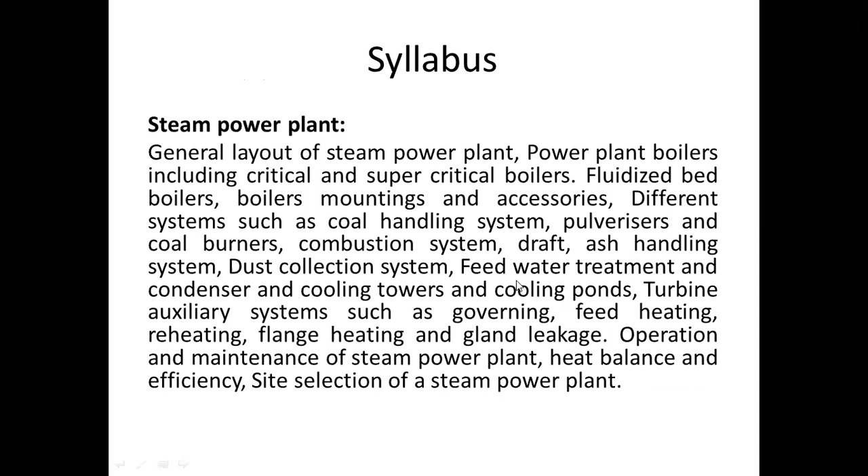यहाँ पर वाटर इज़ नॉट अवेलेबल इन इट्स प्योरेस्ट फॉर्म, दैट्स वाय वी नीड ट्रीटमेंट ऑफ द वाटर। सो उस वाटर को हम प्योरीफाई करते हैं, उस वाटर से इम्प्योरिटीज़ को रिमूव करते हैं। ये थर्मल पावर प्लांट का सिलेबस हमारी यूनिवर्सिटी AKTU लखनऊ ने दिया है, और इस सिलेबस में ये टॉपिक है फीड वाटर ट्रीटमेंट, जो आज हम डिस्कस करेंगे।

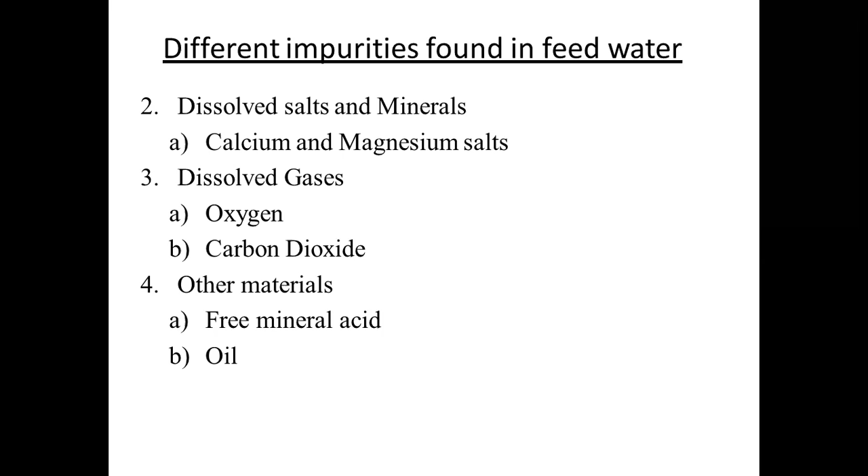सेकंड कैटेगरी है डिजॉल्व्ड सॉल्ट एंड मिनरल्स - कैल्शियम एंड मैग्नीशियम सॉल्ट्स आर डिजॉल्व्ड। कुछ डिजॉल्व्ड गैसेस भी हैं, ऑक्सीजन, कार्बन डाइऑक्साइड, और कुछ अन्य मटेरियल्स भी प्रेजेंट हो सकते हैं जैसे फ्री मिनरल एसिड एंड ऑयल। सो वी हैव टू रिमूव ऑल दीज़ इम्प्योरिटीज़ वन बाय वन।

इस हार्ड एडरिंग और कोटिंग की वजह से बॉयलर की शेल की थर्मल कंडक्टिविटी कम हो जाती है। इन सिंपल वर्ड्स वी कैन से कि बॉयलर शेल, बॉयलर ड्रम, बॉयलर वॉल की हीट ट्रांसफर कैपेसिटी कम हो जाती है और वाटर को हीट कम अवेलेबल हो पाती है।

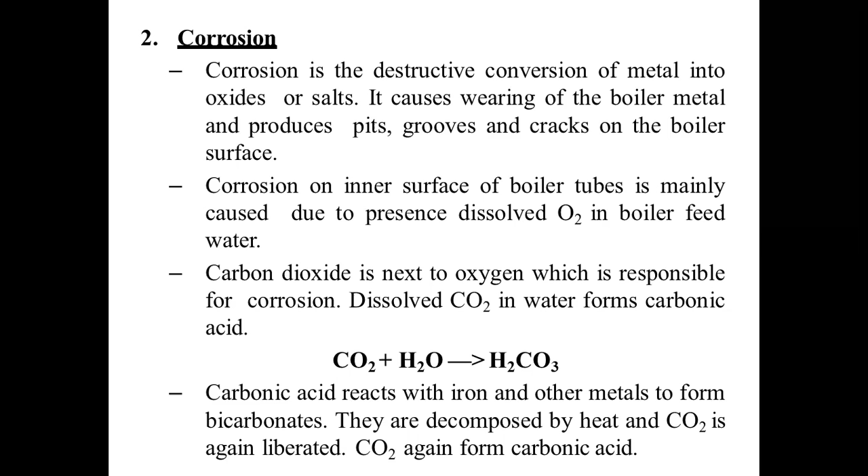Dissolved CO2 in water forms carbonic acid. Here we have shown a reaction: CO2 plus H2O converts into H2CO3. Carbonic acid reacts with iron and other metals to form bicarbonates. These bicarbonates are decomposed by heat and CO2 is again liberated, which mixes with H2O to form carbonic acid again. Then carbonic acid again forms bicarbonate and liberates CO2. So this cycle continues and continues.

Third effect is priming, foaming and carryover. Due to the presence of soluble and insoluble salts in water, the steam passage is filled with a mass of frothy bubbles, known as foaming. Foaming can be reduced by adding castor oil, anti-foaming agents, and sodium aluminate.

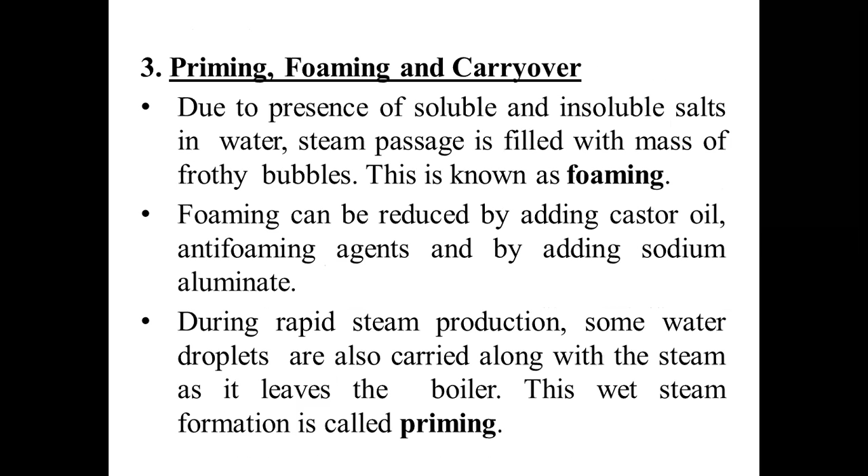During rapid steam production, some water droplets are also carried along with steam as it leaves the boiler. This wet steam formation is called priming. Priming and foaming occur together and this is referred to as carryover.

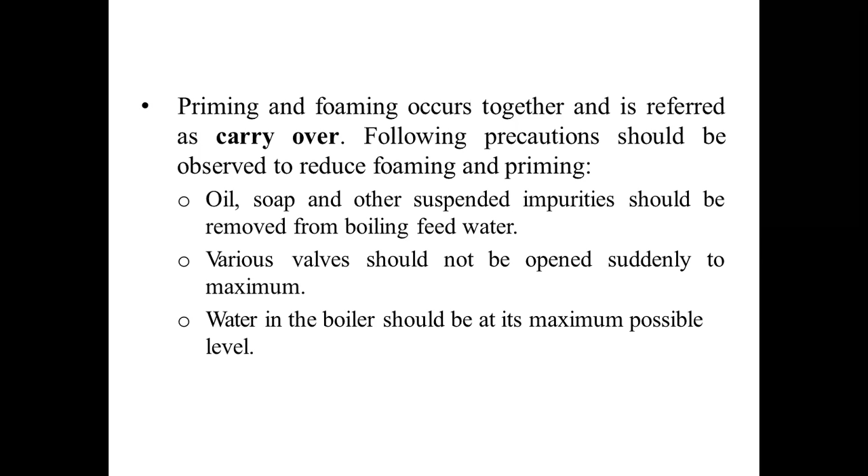Following precautions should be observed to reduce foaming and priming: oil, soap and other suspended impurities should be removed from boiler feed water; various valves should not be opened suddenly to the maximum, they must be opened slowly; and water in the boiler should be kept at its maximum possible level.

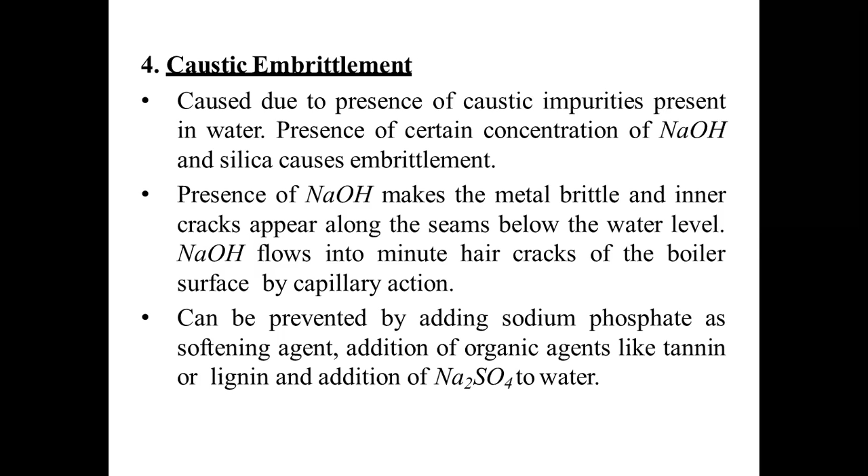The fourth effect is caustic embrittlement, caused due to the presence of caustic impurities in the water. Presence of certain concentrations of NaOH and silica cause embrittlement. Presence of NaOH makes the metal brittle and inner cracks appear along the seam below the water level. NaOH flows into minute hair cracks on the boiler surface by capillary action, and this can be prevented by adding sodium phosphate as a softening agent, adding organic agents like tannin or lignin, and adding Na2SO4 to the water.

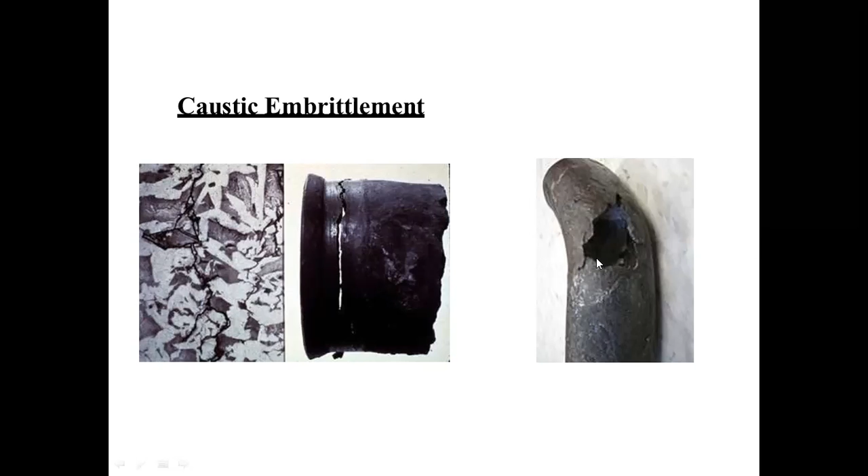Now what is the role of pH in corrosion and scale formation? pH is the power of hydrogen. The pH value of water is the logarithm of the reciprocal of the hydrogen ion concentration in water. If the concentration of hydrogen ion in water is 10 raised to minus 7, then the pH value of the water will be log of 1 by 10 raised to minus 7, which is equal to 7 at 20 degrees Celsius.

So when the pH value of water is 7, it is considered good water. pH value varies from 0 to 14. A sample of water having a pH value less than 7 indicates acidity, and more than 7 indicates alkalinity. Since pH is a logarithmic function, solutions with pH values of 6, 5 and 4 are respectively 10, 100 and 1000 times more acidic than a solution with pH value 7.

So we want the water to be available at pH value 7. What is the role of pH? The corrosion rate of iron in absence of oxygen is inversely proportional to pH value. At lower pH values, iron will be more soluble. The oxygen in water unites with ferrous hydroxide to form ferric hydroxide. The pH value of feed water should be kept greater than 9.6.

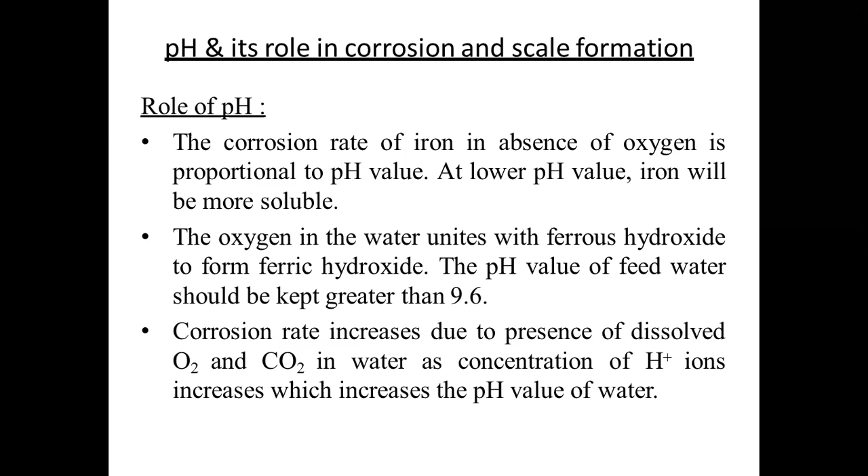Now we will discuss the water treatment system. One is internal water treatment system. In this method, dissolved solids are removed in the boiler itself by adding chemicals, either to precipitate the impurities so they can be removed in the form of sludge, or to convert impurities into harmless salt. So there are various methods available.

The methods are sodium carbonate treatment, phosphate treatment, sodium aluminate, colloidal treatment, and blowdown system.

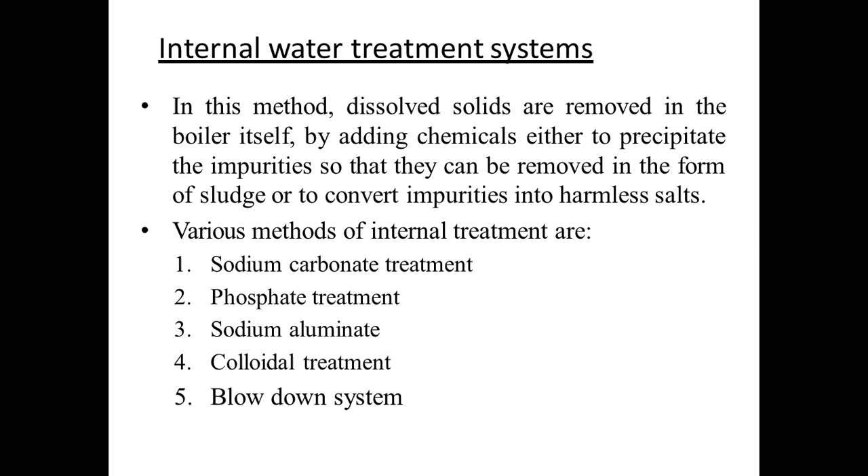Dissolved solids are removed by adding sodium carbonate, Na2CO3, also known as soda ash, to boiler water. Here CaSO4, calcium sulfate, is the impurity. We add soda ash, Na2CO3, which converts it into CaCO3, which is insoluble, and Na2SO4. This Na2SO4, when it comes in contact with water and gets heat, converts into NaOH, H2O, and CO2.

To remove this NaOH, we add MgSO4, magnesium sulfate. When magnesium sulfate comes in contact with NaOH, it converts into Mg(OH)2, which is sludge, and Na2SO4. So we can remove this sludge.

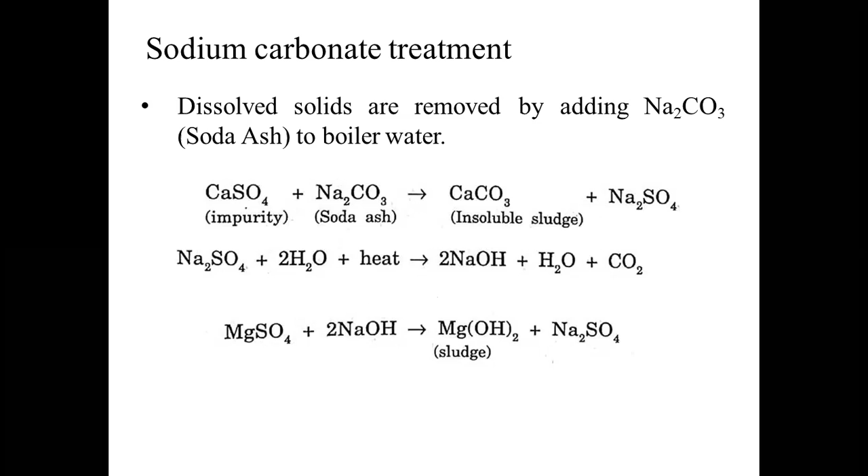Monosodium phosphate is used for highly alkaline boiler water. Disodium phosphate is preferred for moderate alkaline boiler water, and trisodium phosphate is preferred for less alkaline water. So you have to see which type of water is available.

So before applying sodium phosphate, you must know which type of water it is, whether higher alkaline, moderately alkaline, or less alkaline water.

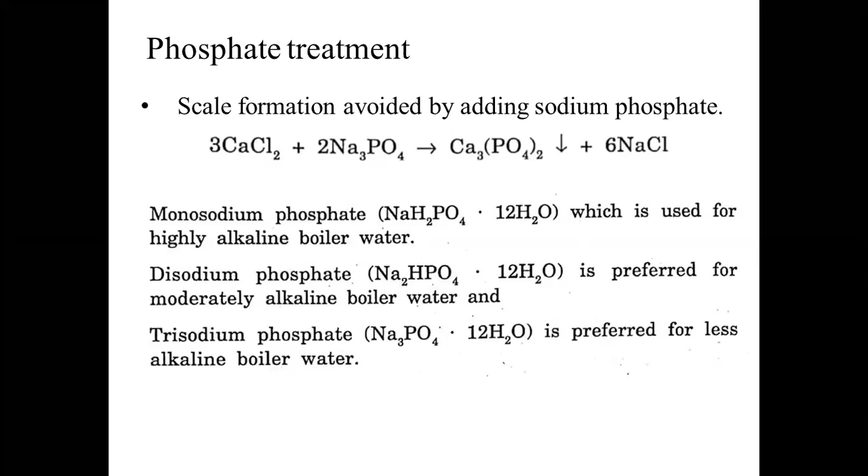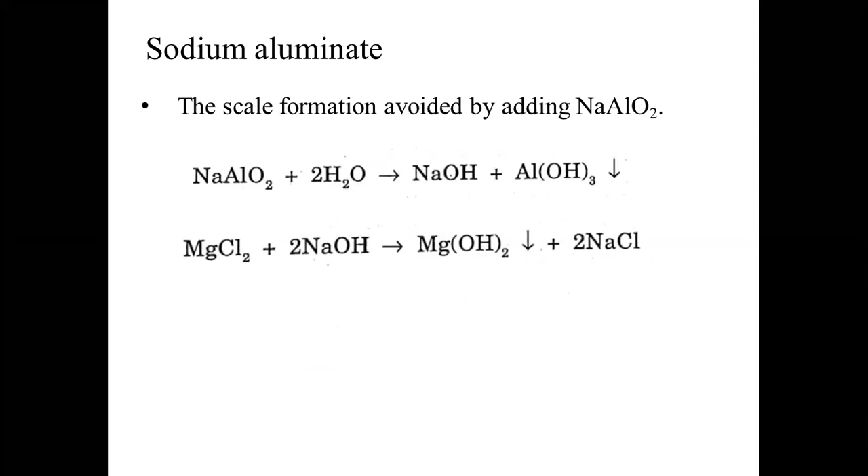Next one is sodium aluminate. Here scale formation can be avoided by adding sodium aluminate to the water. Whenever we add sodium aluminate to the water, it converts into NaOH and Al(OH)3. Also this NaOH comes in contact with MgCl2 and converts into Mg(OH)2 plus NaCl.

Next one is colloidal treatment. It is used for low pressure boilers to prevent scale formation by adding organic substances like tannin, starch, lignin, kerosene. A coating of these substances is formed over scale-forming precipitates, resulting in the formation of non-sticky and loose deposits similar to sludge, which can be removed by blowdown.

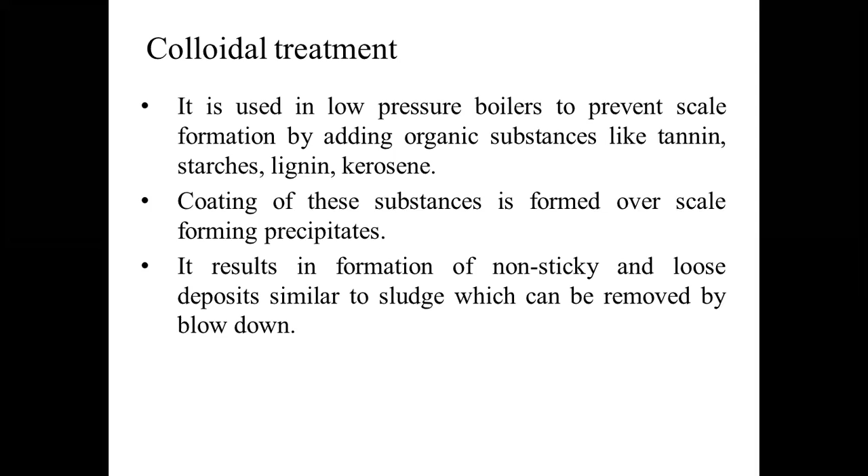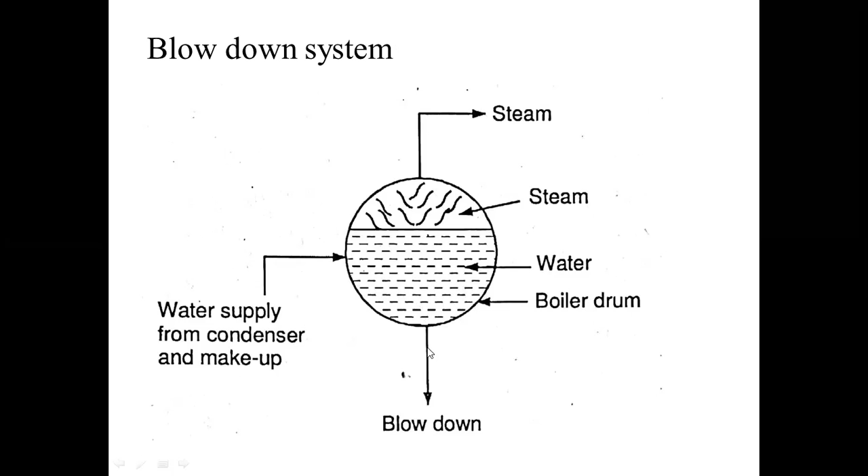Now the blowdown system. You can see here there is a boiler drum. In this boiler drum, water is filled, and when we supply heat to the water, some of it converts into steam, which can be collected from the top. Now the impurities that settle down at the bottom can be removed from here, which is the blowdown.

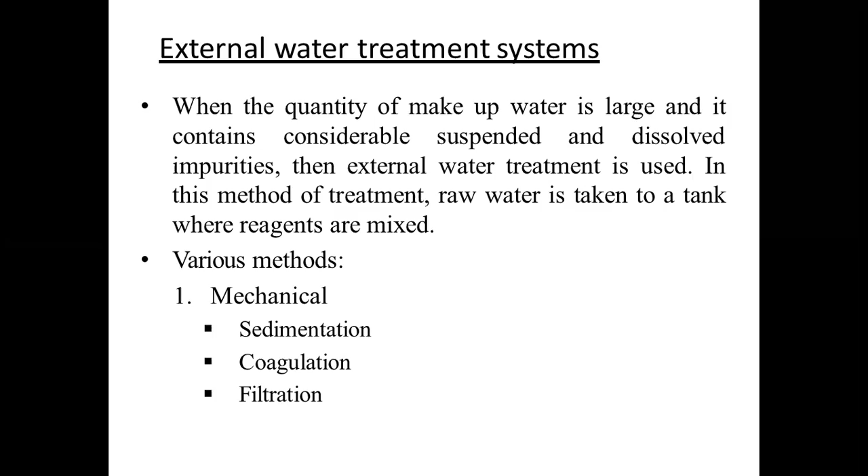In this method of treatment, raw water is taken to a tank where reagents are mixed. Various methods are available for external water treatment. One is mechanical method, where we do sedimentation, coagulation, filtration. There is thermal method, in which distillation, evaporation, and deaeration is done. And next is chemical treatment, where lime soda treatment, zeolite process, and demineralization is done.

Now we are talking about sedimentation. What is sedimentation? In this method, water is allowed to remain standstill in a big tank, or to flow at very low velocity. The solid matter settles down due to gravity, which can be removed periodically or continuously. Clean water is taken from the surface of the tank.

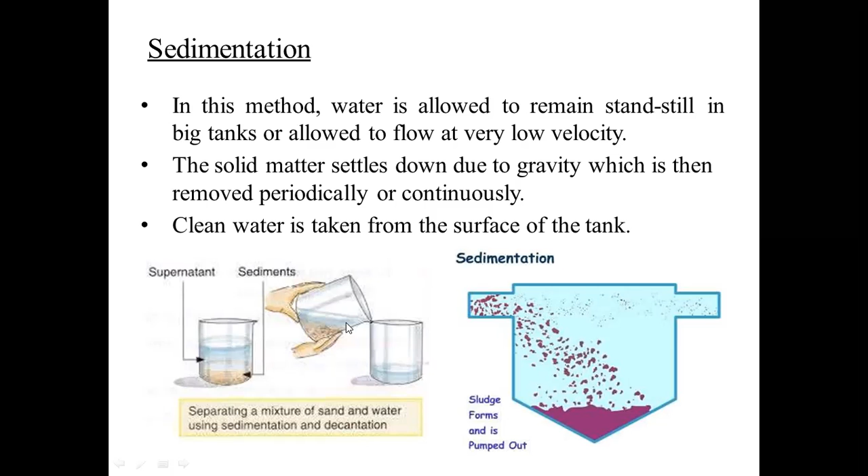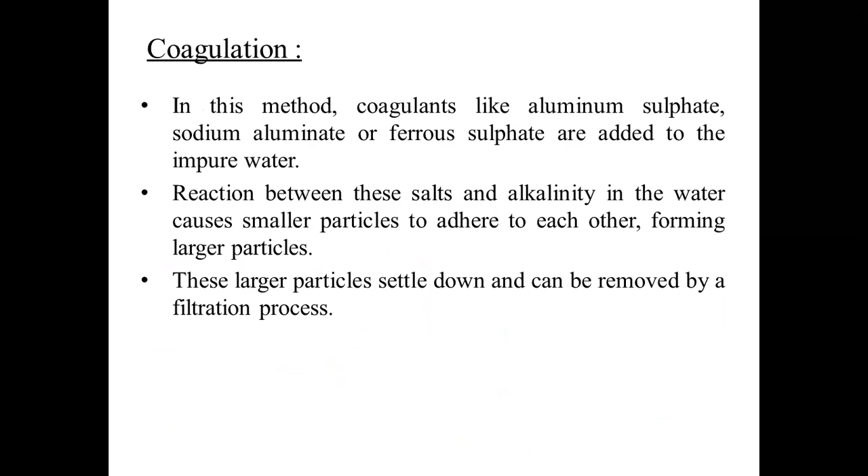Next one is coagulation. In this method, some coagulant like aluminum sulfate, sodium aluminate, or ferrous sulfate is added to the impure water. Reaction between these salts and alkalinities in the water causes smaller particles to adhere to each other, forming large particles. When there are large particles, they settle down and can be removed by filtration method.

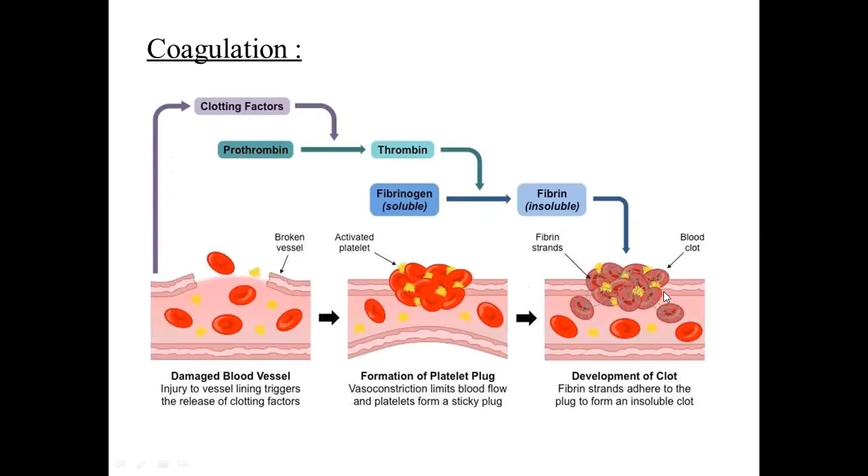So you can see here, this is the same water which you have to clear or filter. Here you can say there are damaged blood vessels, injury to vessel lining triggers the release of clotting factors. So when we add some coagulation material, these become like a blood clot.

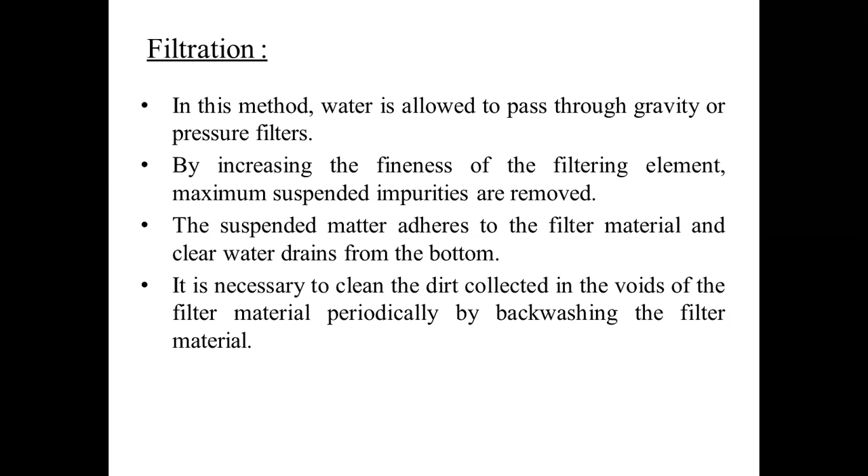Filtration. In this method, water is allowed to pass through gravity or pressure filter. By increasing the fineness of filtering element, maximum suspended impurities can be removed. The suspended matter adheres to the filter material and clear water drains from the bottom. It is necessary to clean the dirt collected in the void of filter material periodically by backwashing the filter material.

You can see here, this water is a mixture of water and sand. So here we are using a funnel, and in the funnel we are placing a filter paper. So when we allow this water to pass through this filter paper, only water passes the filter paper, and the dust particles or sand particles are not allowed, so they remain here. So this is the residue, and time to time we have to remove this residue.

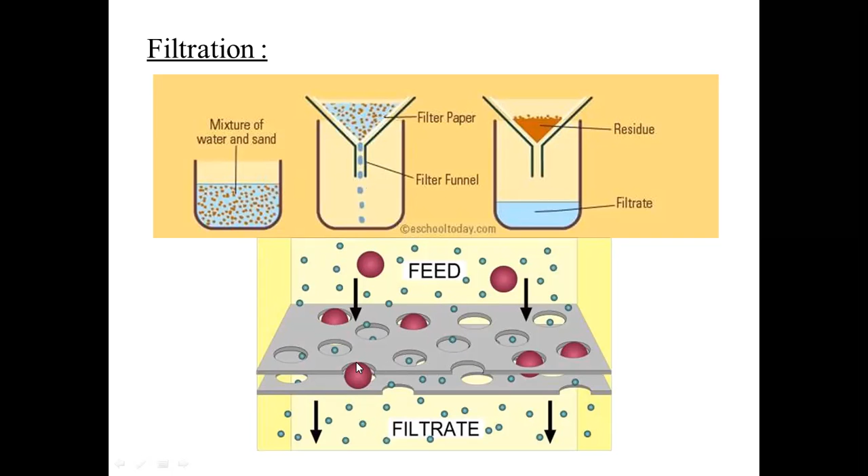You can see more clearly in this water. This is a filter paper. These blue small balls are water particles and bigger balls are impurities. So impurities are blocked or kept here, stopped here, and water particles are allowed to pass through this filter.

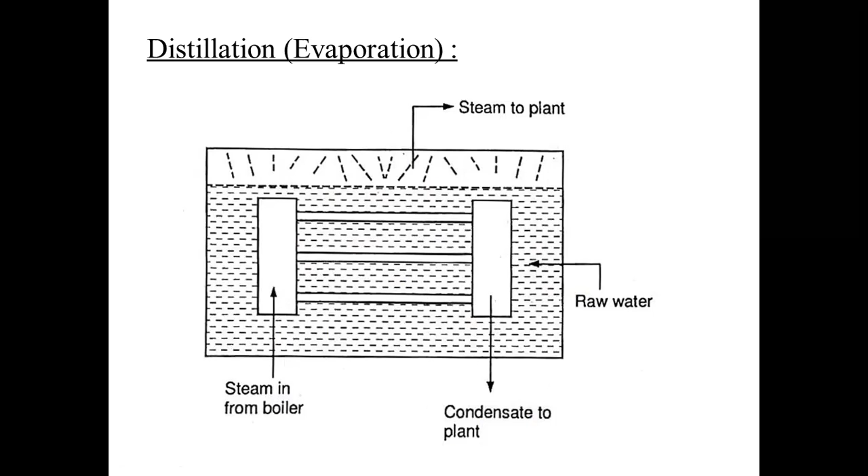Next one is distillation. So in the case of distillation, the raw water is filled in a tank, and we supply hot air or steam from the boilers, and it passes through the water and then comes back to the plant. This heat allows the water particles to evaporate, so the evaporated particles or steam particles are the purest form of water, which can be collected from the top and used for further processes.

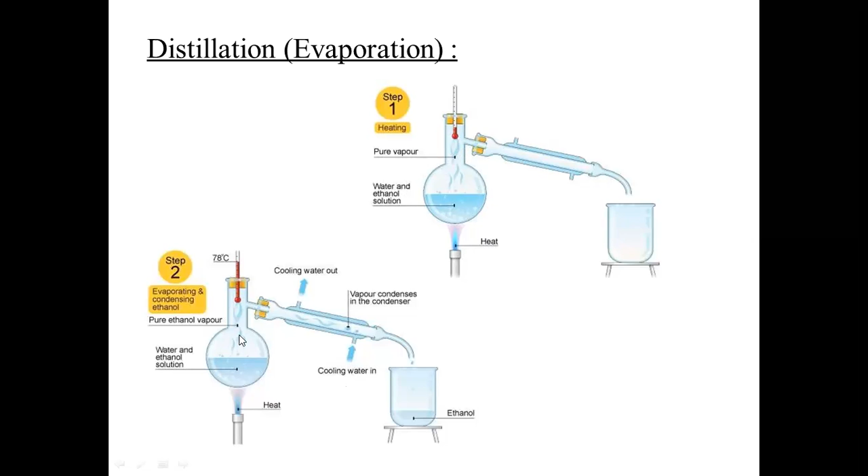Next one is distillation, evaporation. There is a flask where water and ethanol solution is there. We apply heat, so whenever we apply the heat, vapors come out, and those vapors can be collected in a beaker through the tubes. This is the second case, where pure ethanol vapors can be collected from the water by the same process.

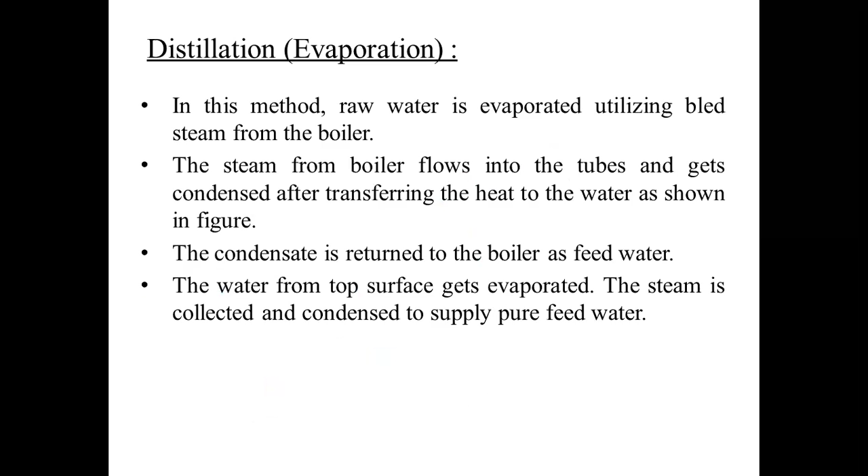So in this method, raw water is evaporated utilizing bled steam from the boiler. The steam from the boiler flows into tubes and gets condensed after transferring the heat to water, as shown in the figure. The condensate is returned to the boiler as feed water, and the water from the top surface, that is steam from the top surface, can be collected and condensed to supply pure feed water.

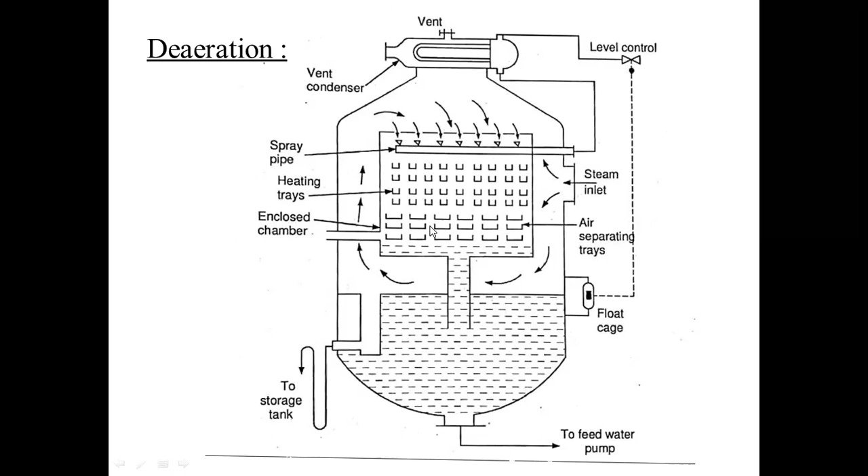Next one is de-aeration. So you can see there's a diagram of de-aeration. In this diagram you can see there is a tank where water is filled here. In de-aeration, this water is supplied here, and hot water or steam is supplied from this passage. So when this hot water or steam comes in contact, it gets cooled down and water collects here, and air moves outside, and from there water can be supplied through the help of water feed pump.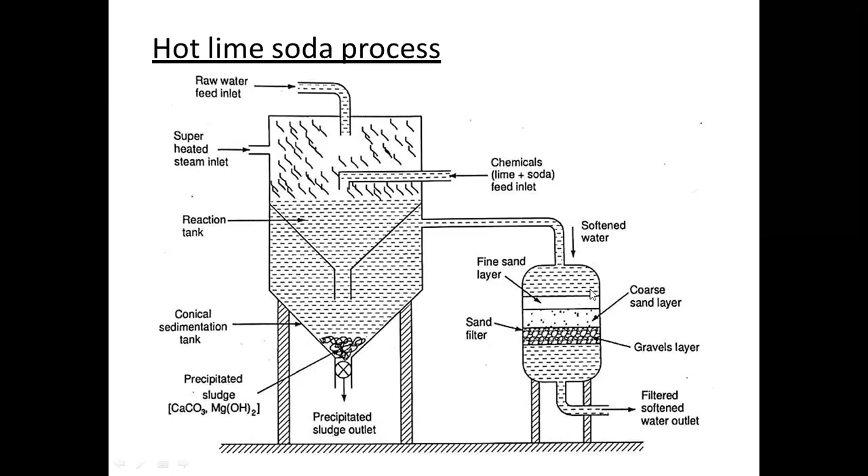There is one hot lime soda process. Again, you can see in this diagram we are using hot lime soda processes. Here raw water is supplied here, and superheated steam is supplied here. Chemical, that is lime and soda, we supply here. There is a reaction tank where it gets reacted, and all the impurities settle down at the bottom in the form of sludge - CaCO3, Mg(OH)2, salt waste, etc. From the bottom they can be removed, and the water, which is comparatively soft water, can be supplied to another tank where it can be further processed. Same thing you can see here.

So if we are talking about hot lime soda process, the chemical reactions that take place are listed below. The carbonate hardness is removed by hot lime. You can see here CaHCO3 plus Ca(OH)2 is converted into CaCO3 and water. And Mg(HCO3)2 also gets reacted with Ca(OH)2, converting into CaCO3 and Mg(OH)2 and water.

The sulfate hardness of calcium and magnesium is removed by soda ash. So here you can see CaSO4 plus Na2CO3 converts into CaCO3 and Na2SO4. MgSO4 plus Na2CO3 converts into MgCO3 and Na2SO4.

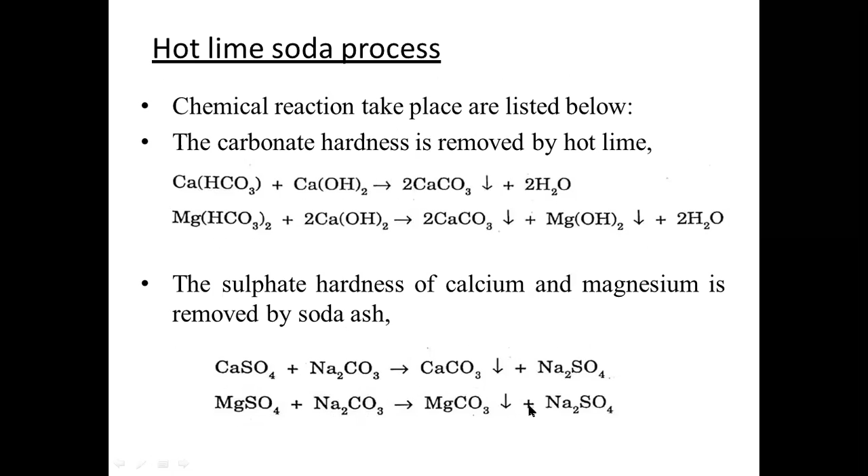The chloride hardness of calcium and magnesium are removed by soda and lime respectively, as you can see here. CaCl2 plus Na2CO3 converts into CaCO3 plus NaCl. MgCl2 plus Ca(OH)2 converts into Mg(OH)2 plus CaCl2.

Sometimes trisodium phosphate and caustic soda are also used in addition to lime and soda. Phosphate is very effective in removing calcium and magnesium salts. So CaHCO3 whole twice plus NaOH converts into CaCO3 and Na2CO3 and water. Similarly, Mg(HCO3)2 and NaOH converts into Mg(OH)2 and Na2CO3 and water. Similarly, CaSO4 and Na3PO4 converts into Ca3(PO4)2 and Na2SO4, and MgSO4 and Na3PO4 converts into Mg3(PO4)2 and Na2SO4.

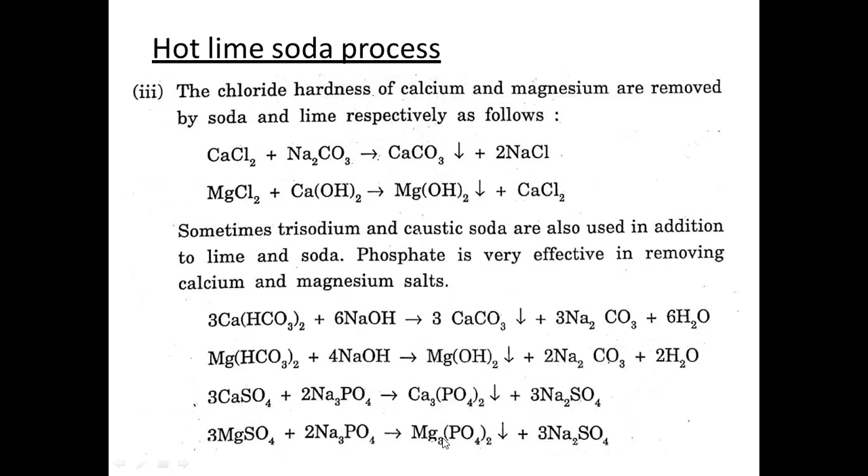What are the advantages of hot lime soda process? The process is very much economical. It is capable of treating a large quantity of water in a relatively small unit. pH value of water rises, which improves the corrosion resistance of water. Silica is effectively removed from the water. The size of the settling tank is reduced as precipitates are larger in size and settle more quickly.

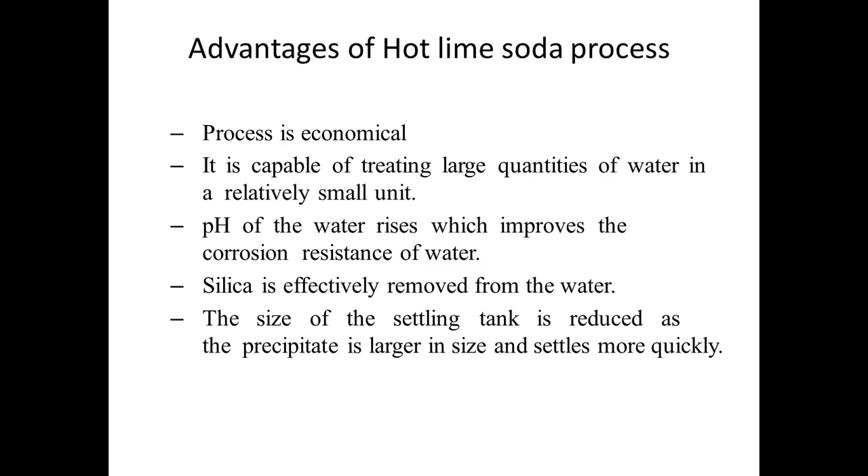But I always told you, when there are advantages there are disadvantages. So some disadvantages are: softness produced by this method is less than zeolite process. Huge amount of sludge is formed and disposal is difficult. Controlling of hot process is difficult.

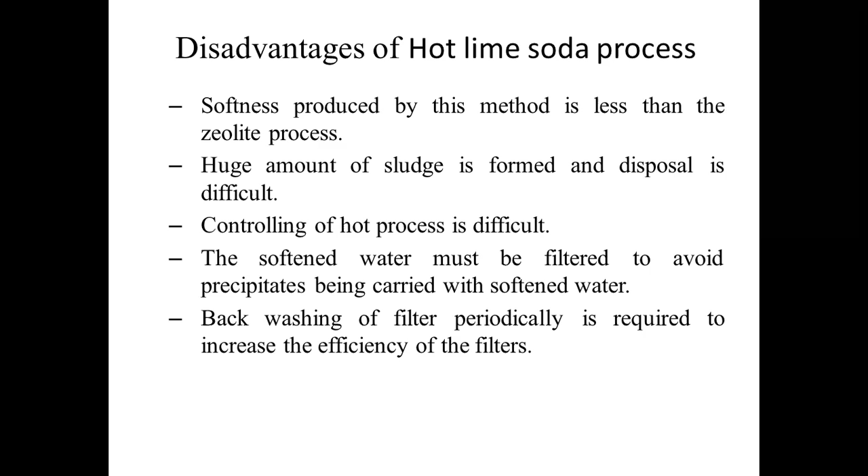The softened water must be filtered to avoid precipitates being carried with softened water. Backwashing of filter periodically is required to increase the efficiency of the filters.

Now there is zeolite ion exchange process. In this process, you can say there is a zeolite bed, right? And that bed is supported by gravel or anthracite.

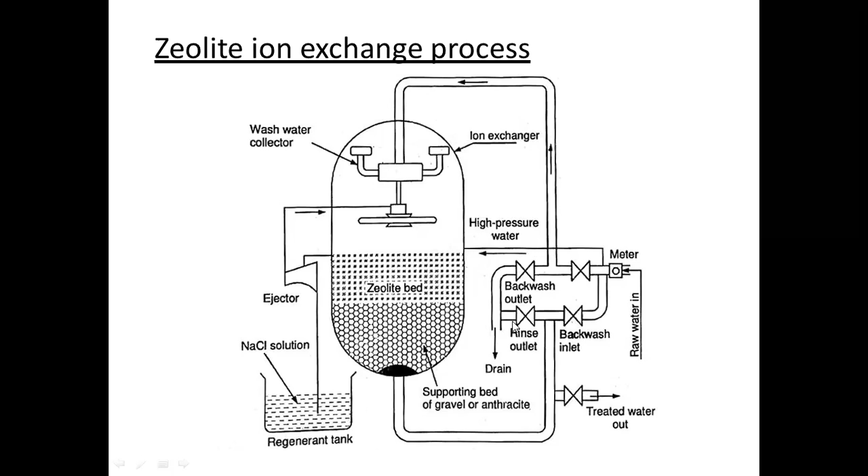Here we are supplying the NaCl solution, and we supply the water. In this case, this is raw water, and raw water is supplied through the meter. So here you can see there is a chemical reaction, and after chemical reactions the fresh water can be collected from here, and waste or drainage can be from here.

So there are various advantages of zeolite process: hardness of water can be removed almost completely up to 10 ppm. There is no sludge formation, hence the process is clean. The process automatically adjusts itself for different hardness of incoming water. The equipment used is small and easy to handle, and it requires very less time for softening. It is not necessary to filter the soft water as it is required in lime soda process.

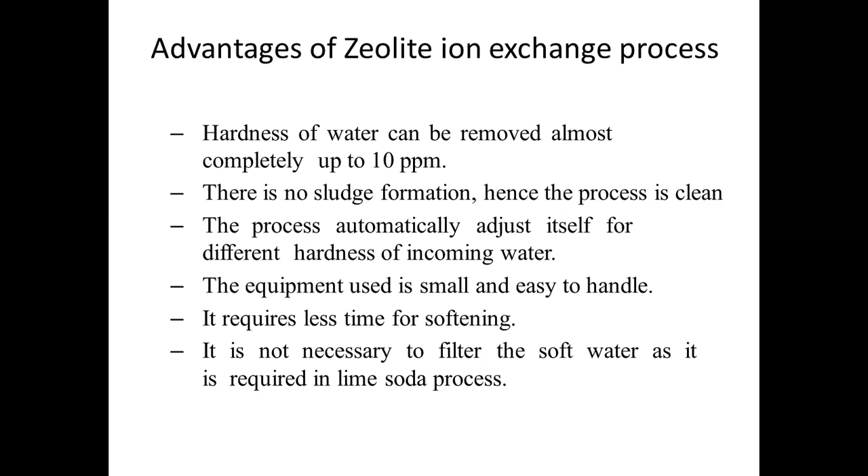But disadvantage is that turbid water cannot be admitted to zeolite bed as it makes the bed inactive. Hence, suspended impurities must be filtered before passing over the bed. Suspended impurities must be removed through a filter, there is no other option.

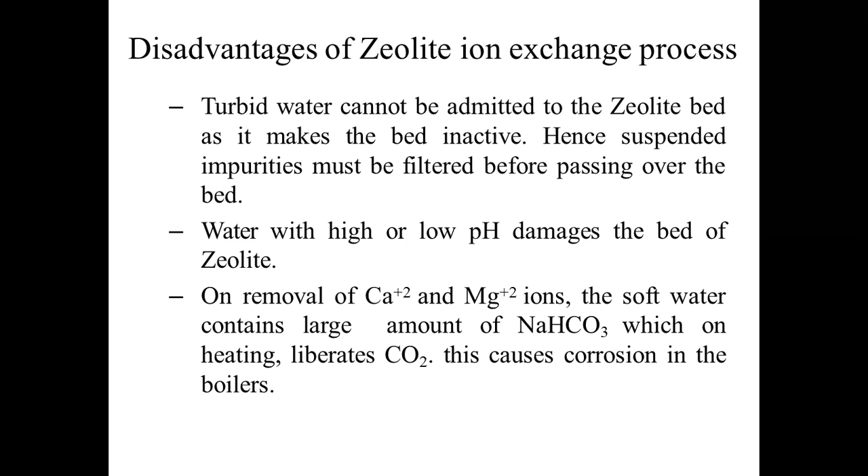Water with high or low pH value damages the bed of zeolite, so pH value must be constant. On removal of Ca2+ and Mg2+ ions, the soft water contains large amount of NaHCO3, which on heating liberates CO2, which can cause problems in the boiler. So these are the few disadvantages of this zeolite process.

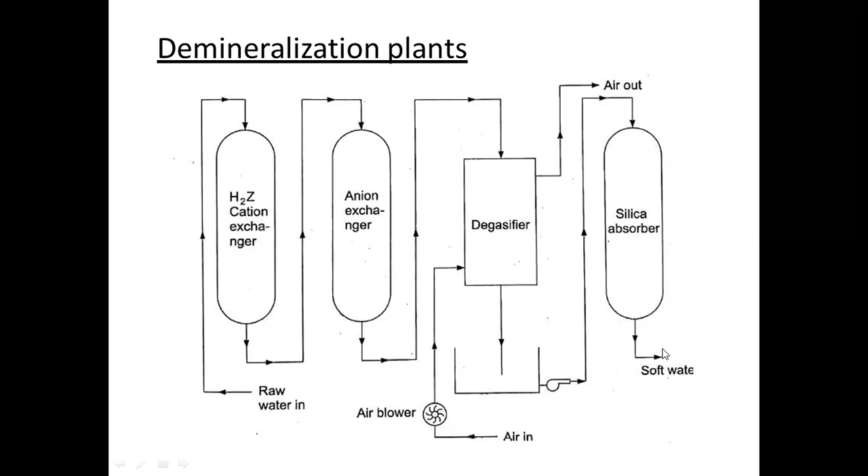So in demineralization plant, the exhausted cation resins can be reactivated using H2SO4 or HCl, whereas anion resins can be reactivated using NaOH or Na2CO3.

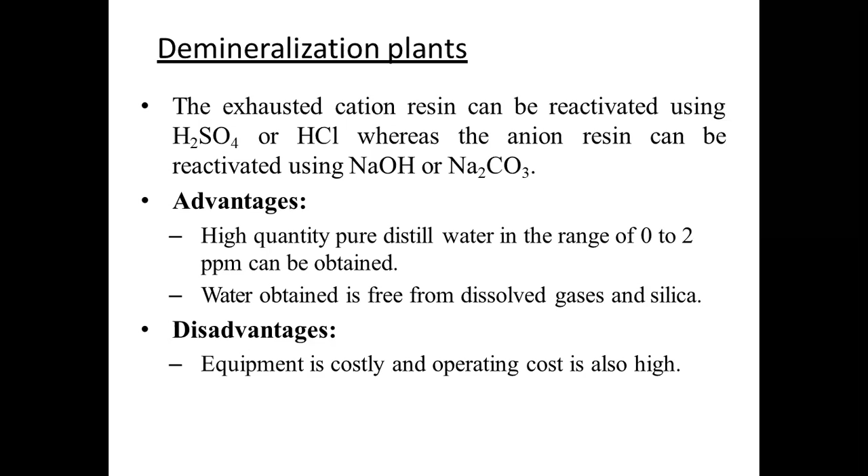The various advantages are that high quantity pure distilled water in the range of 0 to 2 ppm can be obtained. Water obtained is free from dissolved gas and silica, but disadvantage is also that this equipment is very costly and operating cost is very high.

One more process which is known as RO process or reverse osmotic process. You know osmotic process, so here we are doing the opposite of osmotic process, which is known as reverse osmosis process, and you have read this process in your +2 chemistry very well.

So what are the advantages of RO process? It is an efficient method of removing salts, chemical contaminants, and heavy metals such as lead from drinking water. It is cheaper than ion exchange process for water containing dissolved solids of 200 ppm or more.

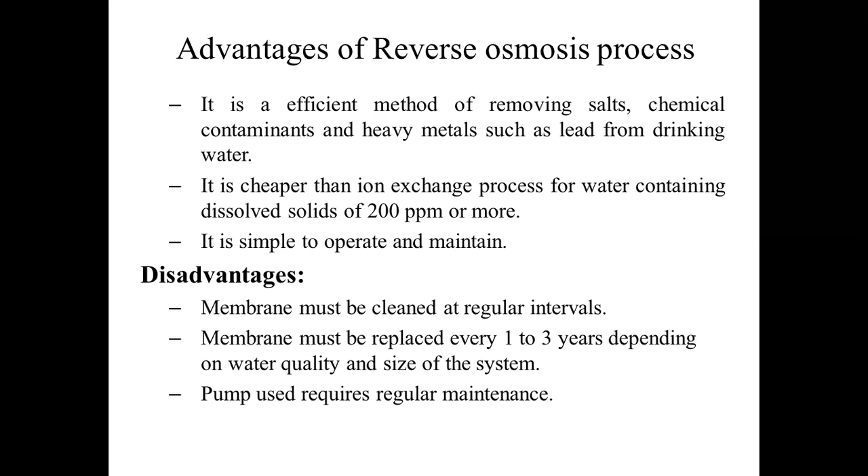It is very simple to operate and maintain, but there are disadvantages also: the membrane is the most costly item, and it must be cleaned at regular intervals, and it must be replaced after every 1 to 3 years depending on water quality and size of the system. Pump used requires regular maintenance.

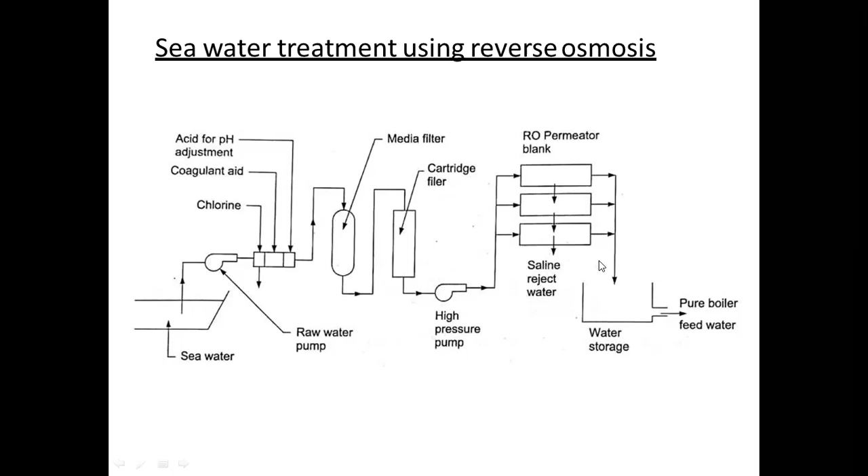This is the sea water. Sea water is lifted with the raw water pump, where chlorine, coagulant, and acid treatment is applied. After that, this water is supplied through media filter, cartridge filter, then RO, saline reject, etc. And here the reject water is there, and this water which is used for the boiler is the purest form of the water. So friends, this is all about the